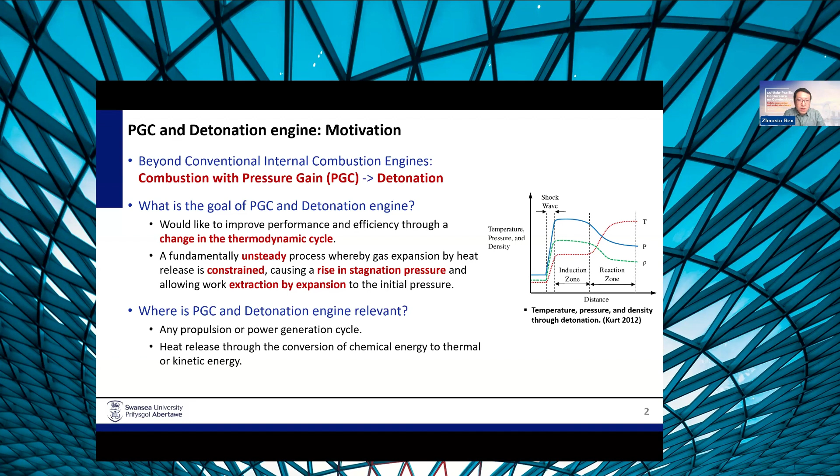We can see that there are different propulsion applications based on this detonation. For example, traditional engines like gas turbines primarily use diffusion combustion, and some rocket engines use premix combustion. On the contrary, detonation engines offer a unifying solution - the same system can be adapted for gas turbine, ramjet, and rocket engine.

From a practical standpoint, conventional combustion chambers are typically cylindrical, but detonation engines do not need such typical geometries, because detonation is a surface-level chemical reaction. This means we can build the combustion chamber more flexibly, in different configurations.

For example, the top left shows the conventional configuration, with two concentric cylinders and the flow channel where detonation occurs. If this setup is compressed, you can transform it into a racetrack-shaped detonation system, shown in the top right figure. The bottom left illustrates how detonation can be integrated into a ramjet or scramjet. This highlights that we can build different configurations and shapes of structures for detonation applications.

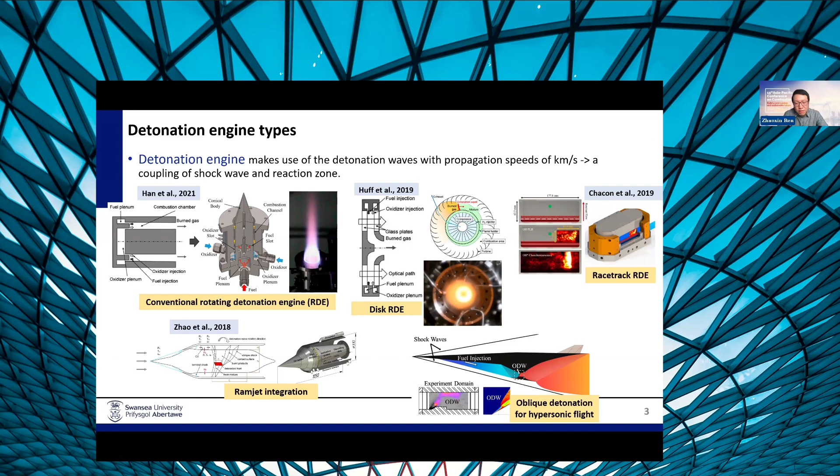If we look at a typical rotating detonation engine, we focus on the flow inside - this is two concentric cylinders, with the detonation wave propagating inside in the circumferential direction, and fuel and air injected from the bottom, as shown in the left figure. Combustion occurs as the detonation wave consumes the mixture.

Because it's a highly compressed system, it involves compressible flow interactions, mixing dynamics, and wave phenomena. The detonation wave front itself is very thin, usually on the order of sub-millimeters, compared with the size of the chamber, which can be meters. This means the length scales cross a very wide range, from millimeters to meters, across the whole engine size.

Another factor: reaching a steady state can take several seconds, but the detonation wave itself is very fast. This means the whole flow scenario crosses a wide range of both length and time scales. This complexity makes detonation flow simulation, in terms of computational cost, very challenging - one of the most difficult flow problems to study.

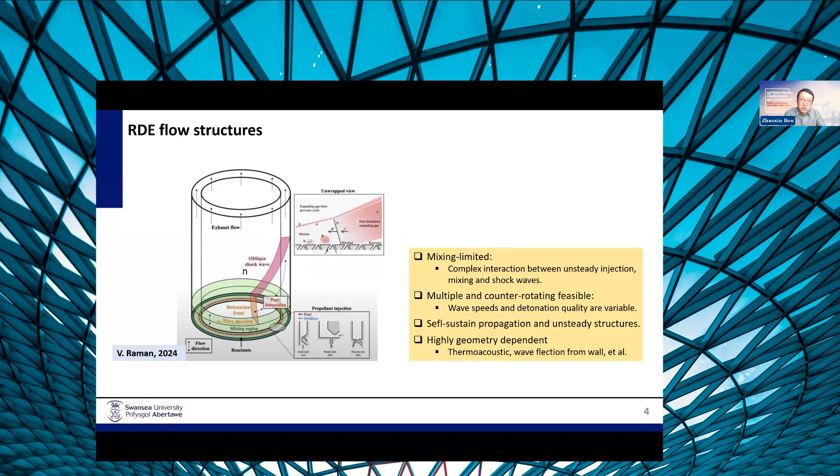If you check the detailed structures of the detonation waves, you can see that they are not smooth surfaces. Instead they exhibit some cellular formations with concave and convex features. These structures play a crucial role in sustaining the detonation propagation.

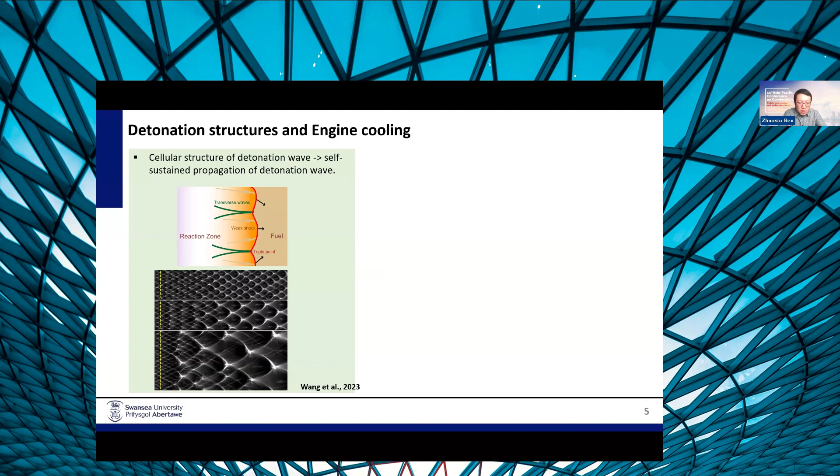If we consider the practical application, the challenge is thermal management, because you can see the very high pressure and temperature of the detonation products. So the cooling channel is typically placed around the outer cylinder. However, the influence of the cooling boundaries on the detonation structures remains unknown to us, which motivates our research.

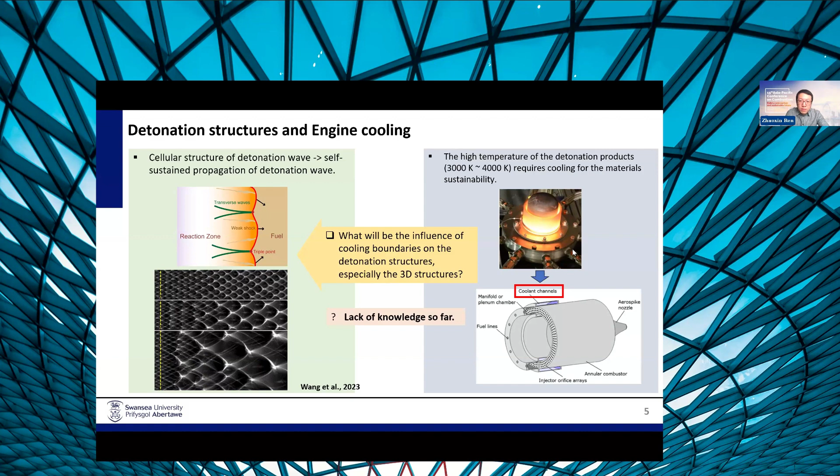For simplicity, we do not consider the curvature of the cylindrical channel. Instead, we model a three-dimensional linear periodic channel. We unwrapped the 3D annular combustion chamber into a straight linear channel, as a replacement, to see the propagation of the detonation wave in this linear channel.

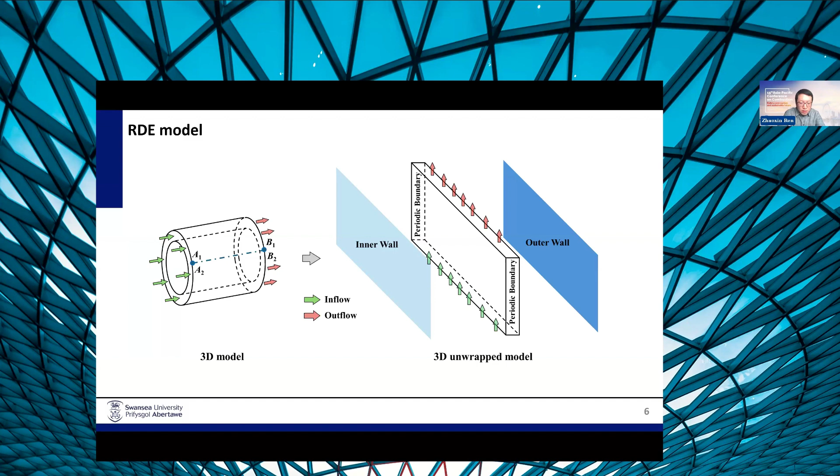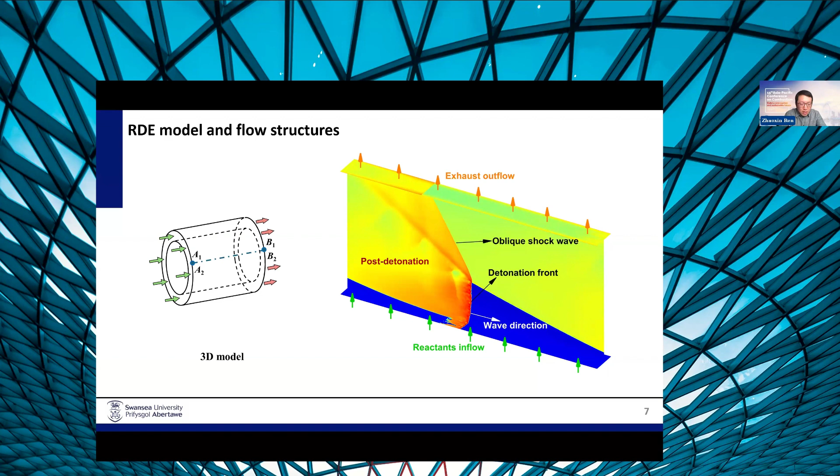You can see that the primary structures in this linear channel are closely similar to the flow structures in the annular chamber. By modifying the thermal conditions on the wall boundaries on each side of the channel, we try to analyze the influence on the detonation propagation and structures.

In this presentation, I will cover first our computation approach, and then we analyze the three-dimensional structures under adiabatic confinement boundaries, and then we try to study some effects of the thermal confinements.

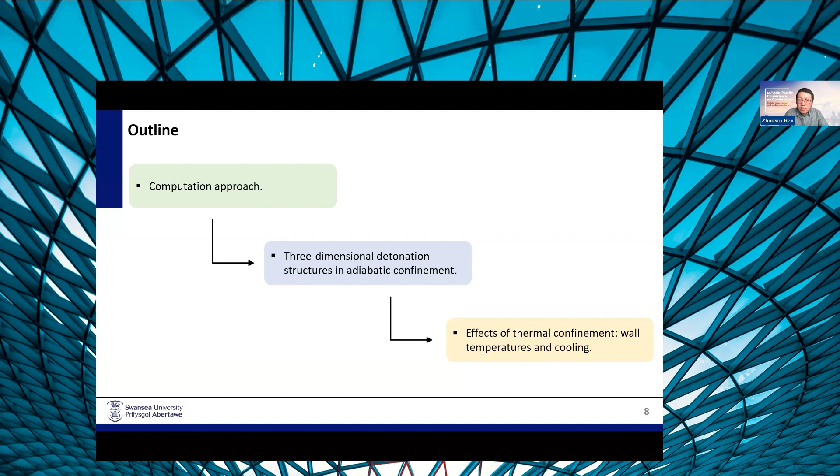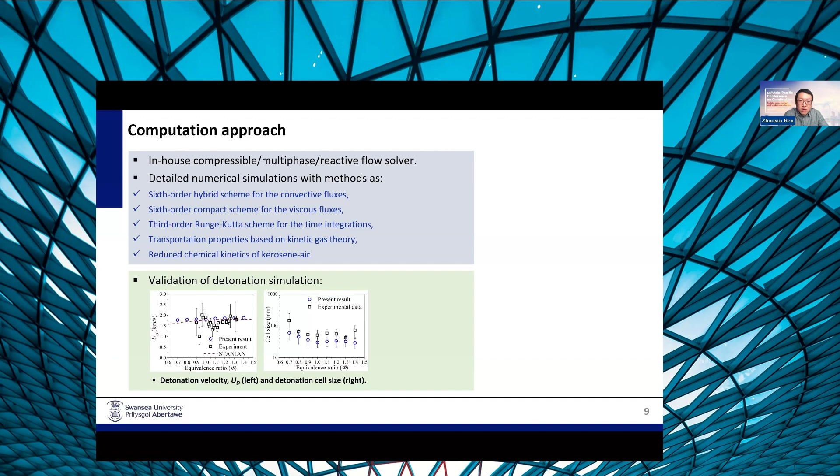For example, we change the wall temperatures after cooling to see how the behavior will change. We use some high order schemes to capture the dynamics of the detonation waves, and we use kinetic gas theory to model the transport properties. Before the simulation, we did some validations, for example comparing cell size and detonation speed with experimental databases.

We choose some proper inlet conditions to mimic a ramjet mode of the detonation engine flying at 25 kilometers height, with a flight Mach number of about 4.5. We choose 3 cases to mimic different scenarios for the thermal confinements.

For the inner wall and outer wall, we choose adiabatic and isothermal conditions to mimic the wall after cooling. The case IAOA means the inner wall and outer wall are both adiabatic. The case ITOT means the inner wall and outer wall are both isothermal at 300 Kelvin after cooling. The case with mixed confinement means the inner wall is adiabatic and the outer wall is isothermal after cooling.

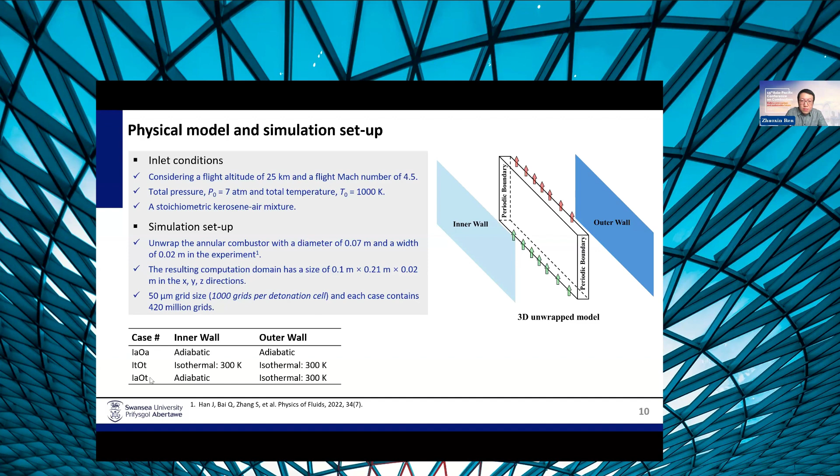First we have a look at some structures under adiabatic walls. The adiabatic walls mean there's no heat transfer across the walls. We can see that a single detonation wave propagates through the channel, as shown on the right side by the sectional views of the pressure and temperature fields.

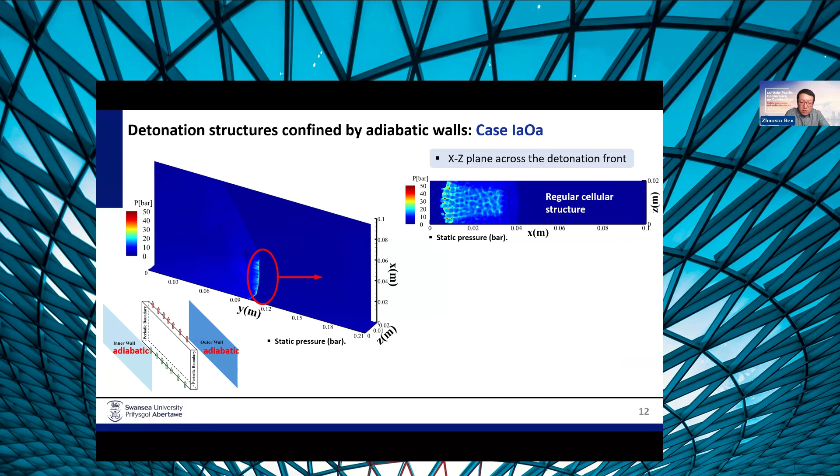If we choose some 2D planes across the detonation front, we can see some regular cellular structures with uniform cell size. So we can see the structure is uniform if we look at the pressure distribution.

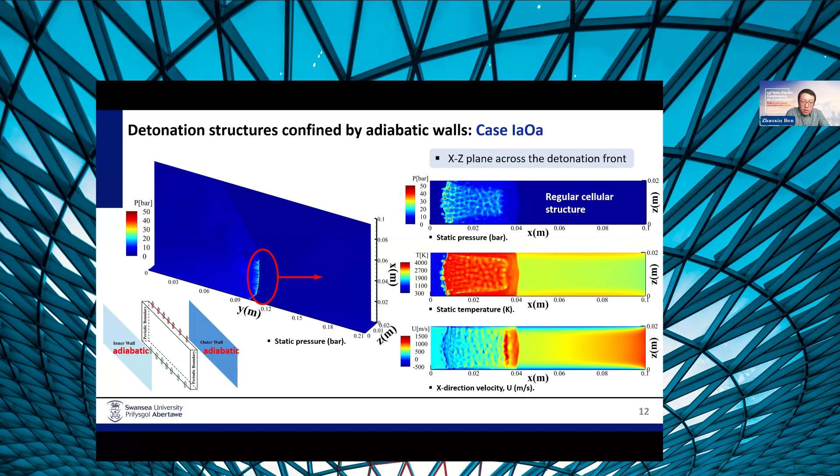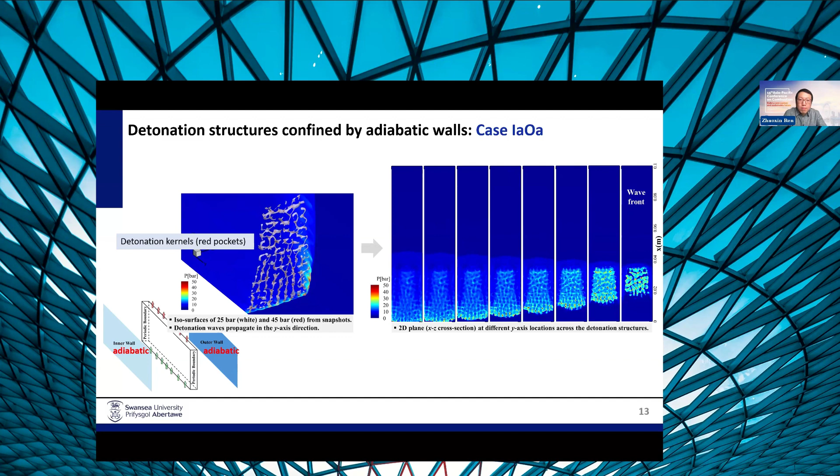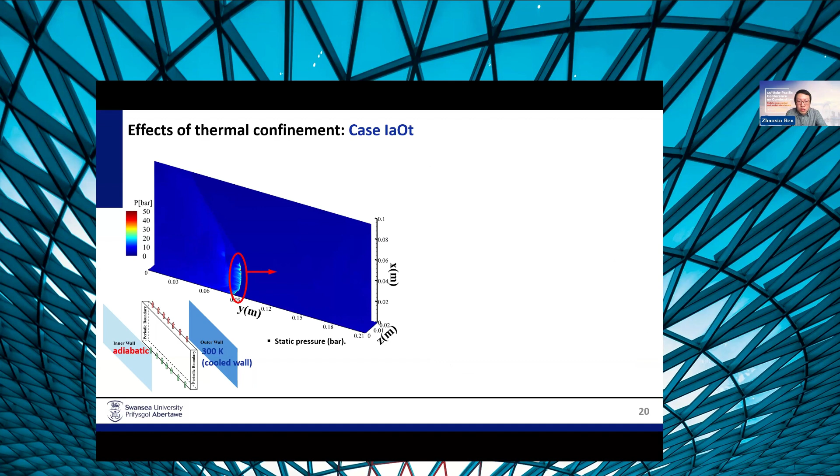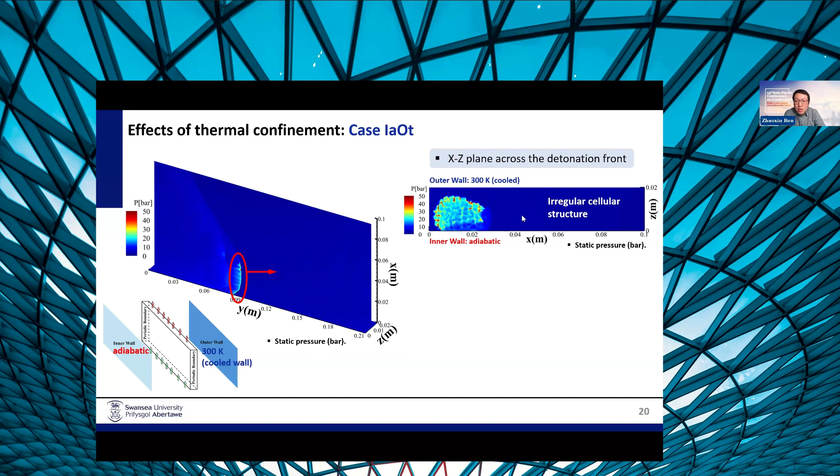Similar to the previous analysis method, we make a cross-section along the detonation front. On the right figure, you can see the cross-sectional plane, a 2D plane, where the outer wall is at 300 Kelvin after cooling, and the inner wall is adiabatic.

We can see that the detonation structure seems like a combination of the structures we previously saw under cooling and adiabatic boundaries. The lower part is similar to the structures under adiabatic confinement, while the upper part is similar to the structures under cooling conditions, resulting in a scenario like irregular cellular structures.

Here's the dynamic process - we can see there's a very strong wave-wall interaction, which results in these irregular detonation structures. You can see the wave propagates towards the cooler side and reflects from the wall and returns back.

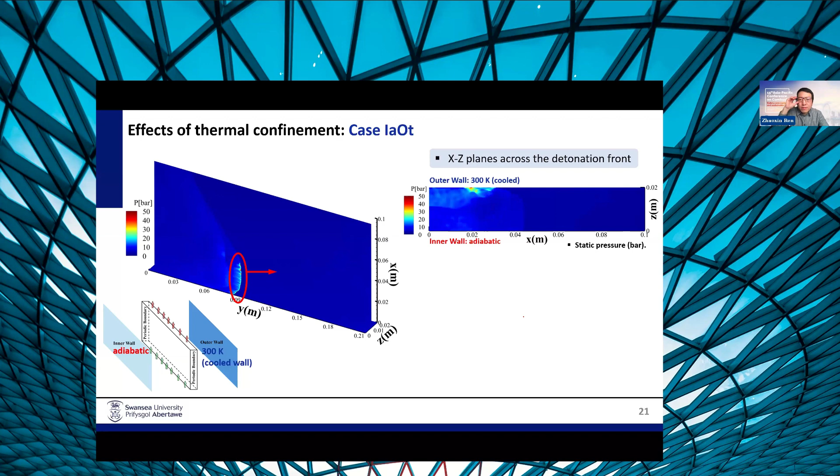Here we have some comparison of the three cases we apply in the study. It can be concluded that the thermal boundaries do have an impact on the detonation structures - not only the number of the detonation waves, but also the three-dimensional detonation structures.

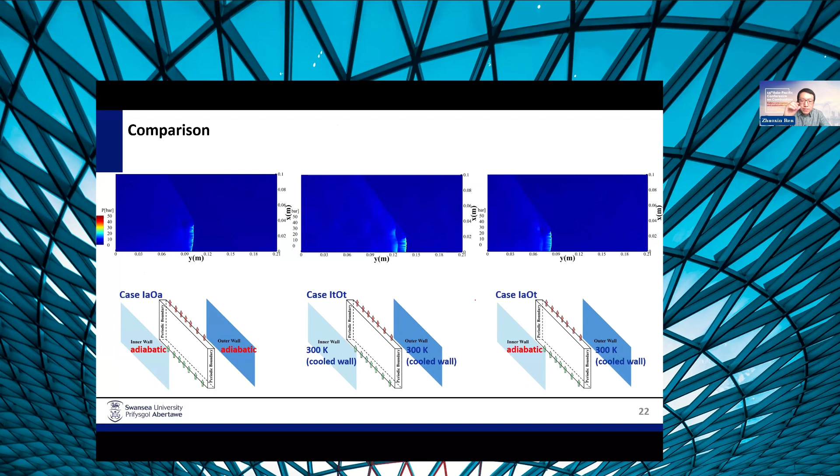Then I would like to look at the dynamics of the cellular structures, analyzed based on the maximum pressure history. This figure shows the 2D slice from the channel. If you see the adiabatic boundaries, they produce detonation cells which appear more regular.

You can see the maximum pressure history here for the adiabatic boundaries - these have similar size for each cell. If you see the case with cooled walls, the cold channel, on the other hand, has no clearly regular detonation structures, as shown by the random white bandings.

In particular, the cells are longer in the direction perpendicular to the propagation direction of the detonation wave. And the elongation pattern of the structures is more obvious near the wall boundaries.

For the mixed thermal confinements, the cells near the cold wall are stretched, as you can see here and here. And the size of the cellular structures near the hot boundaries are more regular.

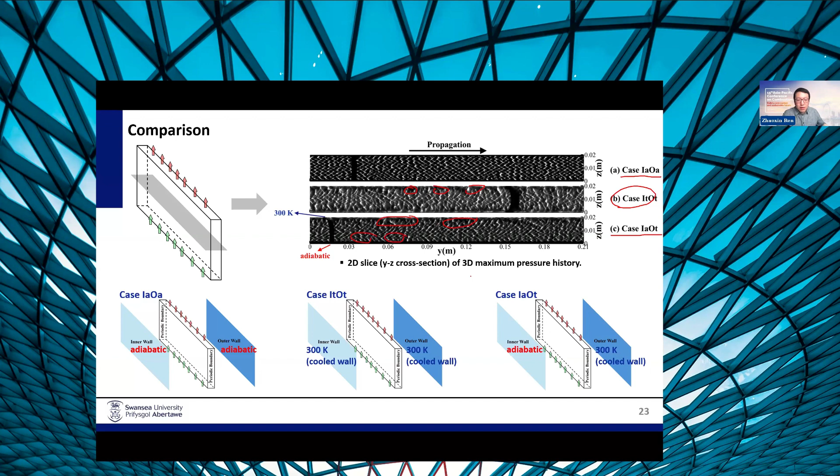If you see the maximum pressure history on the walls for the case with mixed thermal confinements, looking at the wall which has the cold temperature, we can see many white straps here. This is the traces left by the wave and wall interactions.

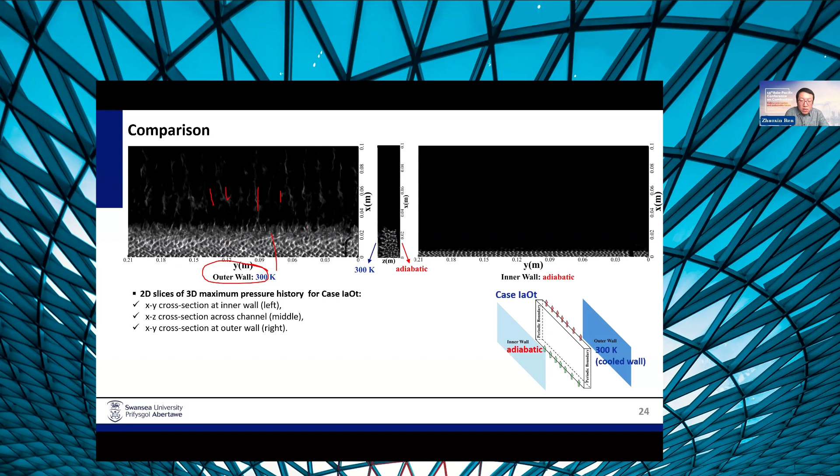Okay, at last we want to see the pressure signals collected by the fixed observation point. These profiles provide some insight into the peak pressures of detonation waves. It's interesting to find that the case with cooled walls shows the highest detonation pressure.

We also see significant instability with large fluctuations of the detonation pressure. Based on the pressure signals, we calculated the detonation wave propagation speed. Initially, the case without cooling has the fastest speed, but after an unstable phase, the cases with cooled walls show similar propagation speed to the adiabatic case.

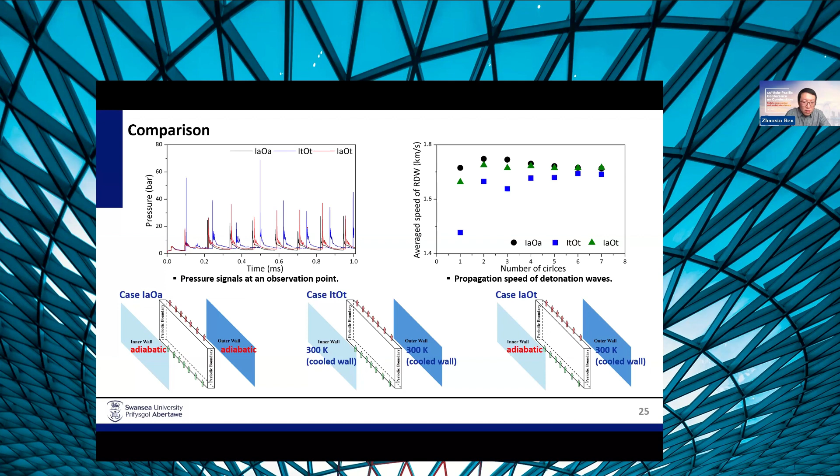So we go to the summary of the research. Thermal boundaries can significantly influence the detonation structures. We have regular structures under adiabatic thermal confinements, but irregular structure patterns under cold boundaries, with some strap-like structures.

We can find two types of detonation kernels: multi-kernels, which is a regular kernel under the adiabatic thermal confinements, but we see some linear detonation kernels under the cold thermal boundaries. And the mixed confinements show hybrid structures with asymmetric wave behavior.

If you look at the pressure signals, the maximum pressure signals reveal that the cold cases exhibit the highest peak pressures, but also the most instability. This shows that if we're considering cooling, we should carefully design how much we can handle the temperature at the wall boundaries.

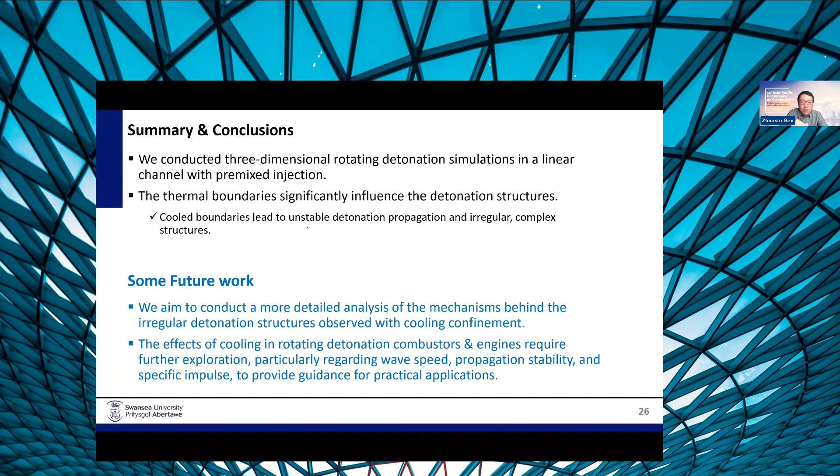For future work, we would like to detail some parametric studies and do experimental validation to further refine our understanding of why irregular detonation structures occur under cooled thermal confinements. So that's my presentation, thank you for listening, and welcome any questions or comments.

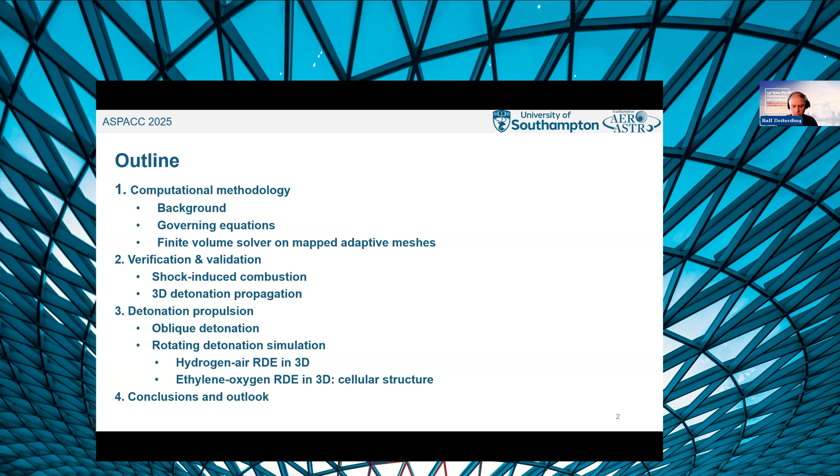Then I have some verification and validation results, some common test cases that people use in the detonation field. In the second part of the talk, I'll talk particularly about detonation propulsion, where I have results about rotating detonation engines, and equally with different temperature boundary conditions.

As mentioned in the introduction, I have put on the internet the AMROC framework. AMROC is a system to do structured mesh adaptation on Cartesian grids. It works such that rectangular grids overlay one another, and these grids talk with interpolation and restriction operations with one another. Mesh adaptivity is particularly important for detonation waves because the interaction between fluid dynamics and chemical reaction is nonlinear, and you need quite some high resolution to capture that correctly.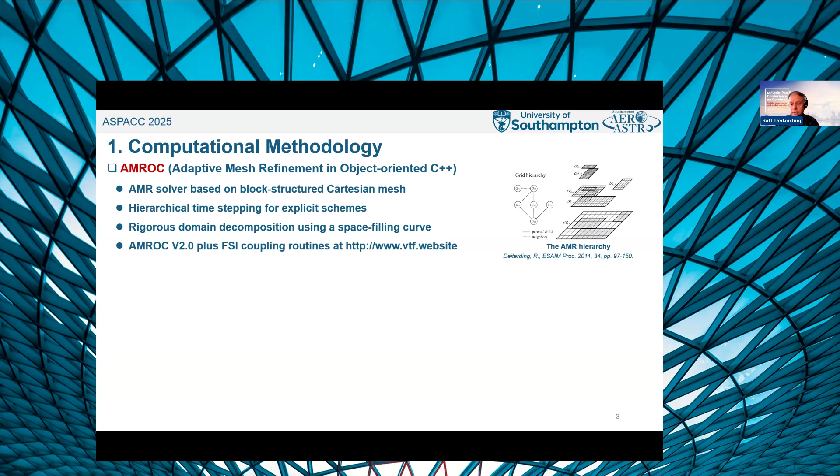AMROC originally in that Cartesian form is not particularly suitable for rotating detonation engines. The original version of AMROC is Cartesian and uses embedded boundary techniques to consider complex geometry. But if you're solving the Navier-Stokes equation with a boundary layer using Cartesian grids, it can be quite inaccurate. A rotating detonation engine is best modeled with a cylindrical mesh, and this is why we recently have put a lot of effort into moving to curvilinear meshes.

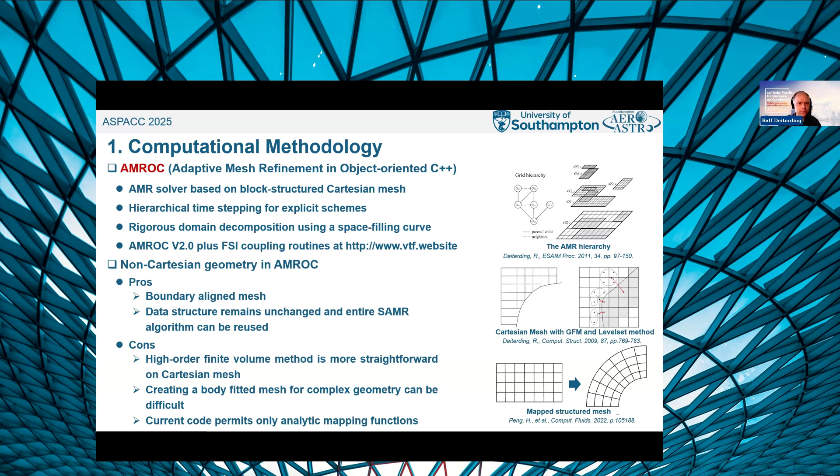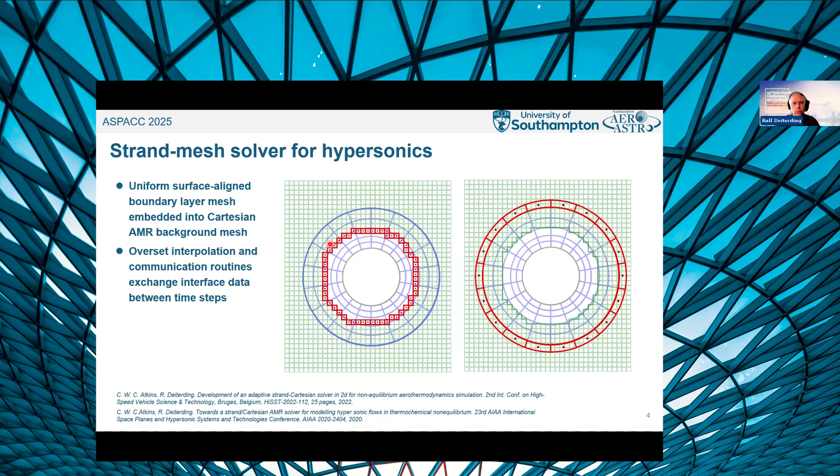The first work we did in this direction was with my PhD student, Chai Atkins. That wasn't for classical combustion, but for hypersonics, meaning particularly thermodynamic non-equilibrium with multi-temperature models and also chemical non-equilibrium from air dissociation. The software we constructed in 2D is an overset mesh technology where we have Cartesian adapting background meshes, and then near the surface of a body, we use body-aligned meshes that are grown in the normal direction to the surface. These meshes talk with one another through overset interpolation operations. You see here at the red cells, this is where interpolation communications have to happen.

We then use this particularly to study typical hypersonic applications, like for instance here, a double wedge in axial geometry. It's actually symmetric, and a shock wave is forming. When we zoom in a little bit, you see that the shock waves, etc., are dynamically captured by the Cartesian mesh.

The boundary layer near the embedded object is captured with its own non-Cartesian mesh. In hypersonics, it's all about the temperature in the boundary layer, and this boundary layer here is resolved very well. This model uses two different temperatures, one for translation and rotation and another for vibrational temperature, as depicted here.

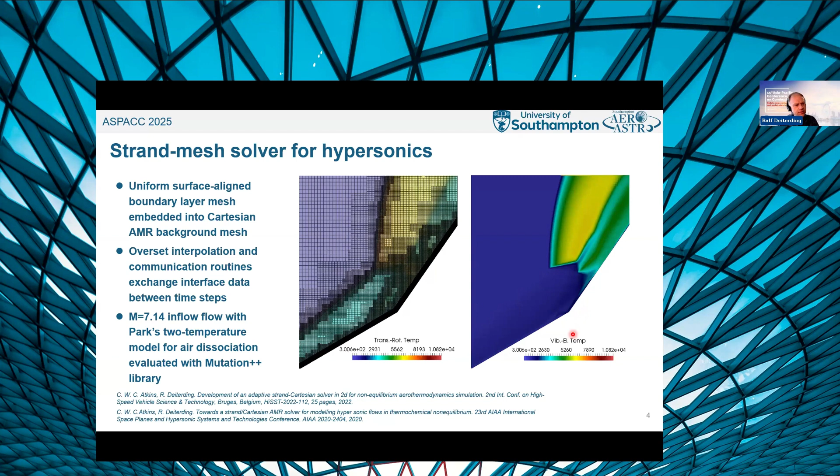So then the chemical reaction, in this case, is evaluated with the Mutation++ library.

Based on this work, in a sequence of papers, Han Peng has been able to extend this methodology particularly to combustion problems. Here we solve fully in 3D, and you will see results about that, the Navier-Stokes equation in the form typically used for combustion modeling. Like in hypersonics, the heat capacities are temperature dependent, but here we take the values from the Janaf table in the form of fourth order polynomials. We use the Chemkin library to evaluate the chemical reaction. Mixture viscosity, mixture conductivity, and diffusivities are all evaluated with Chemkin standard routines.

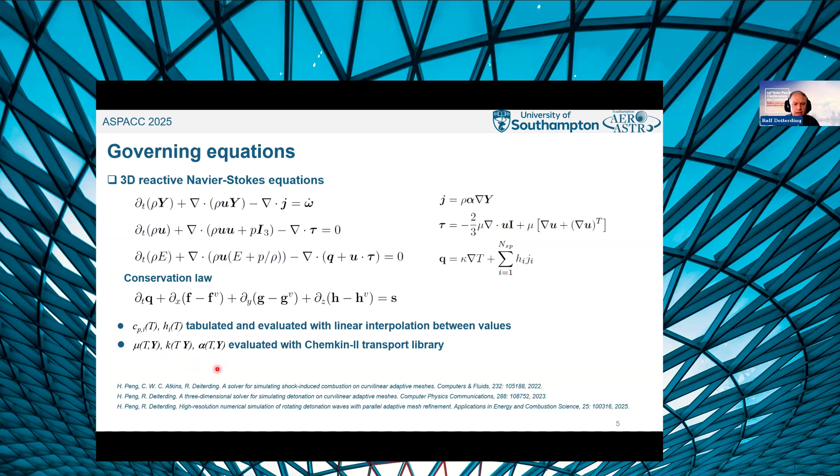While in hypersonics we usually model the degrees of freedom in the gas directly, here, because the data is in polynomial form, we usually go through a form of the energy equation that we effectively have to solve inversely to obtain the temperature. Here, of course, in combustion, there is only one temperature - it's thermodynamic equilibrium, so vibration is not specially considered. We use typical Arrhenius kinetics with only one temperature through Chemkin to evaluate the reactive terms.

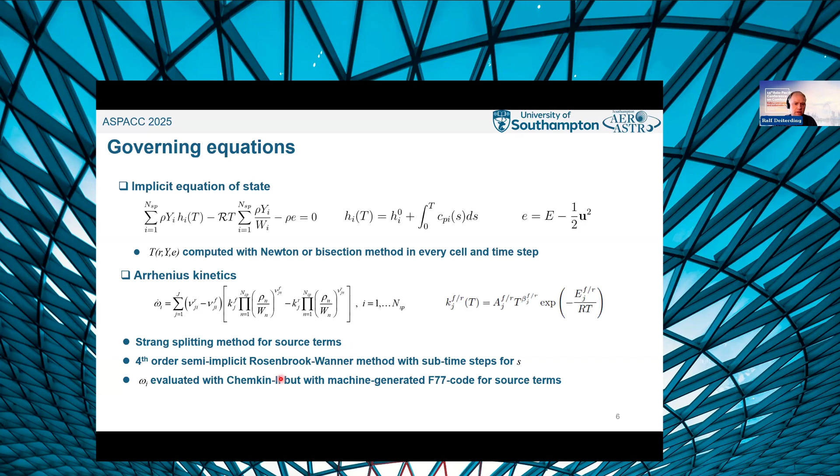The method we are using is a splitting method, so we solve the chemical reaction terms in each finite volume cell. We do this, still today, with a fourth order semi-implicit Rosenbrock-Wanner method. We use the same method also for hypersonics, where we have the non-equilibrium source term in addition, and that method works exceptionally well.

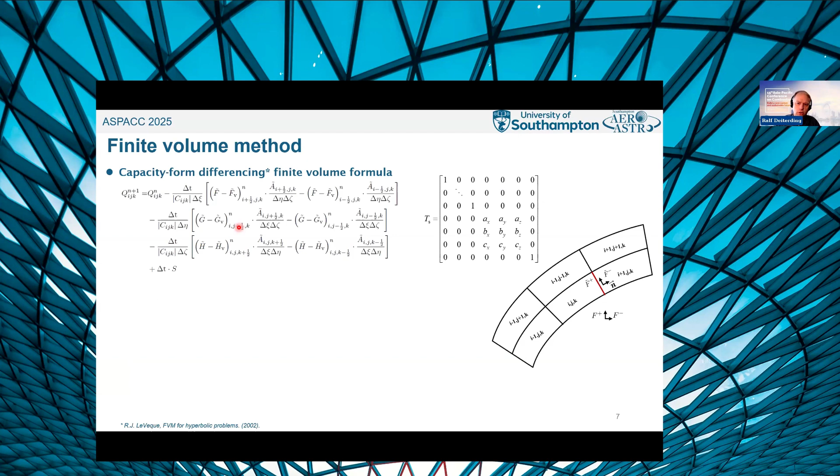When we want to go to non-Cartesian meshes, we have to extend the finite volume formula. We have to consider the change in volume due to the mapping and the different area of the facets. Here we use a form called capacity differencing. In this form, we solve the convective fluxes and then the viscous fluxes, and add them together. When solving for the convective fluxes, we do this with a Riemann solver, which we had from the Cartesian framework.

What we do is use a transformation matrix T that implements a rotation from the physical coordinates to the computational coordinates. We then apply the prior Cartesian Riemann solver, and after obtaining this flux in Cartesian form, we rotate it backwards with the inverse of the transformation matrix. The convective fluxes are enhanced to second order with a Muscl-Hancock approach, and the viscous fluxes are added as central differences in finite volume form. Because in this formula we are adding both fluxes together, we then have to add this to the convective CFL condition.

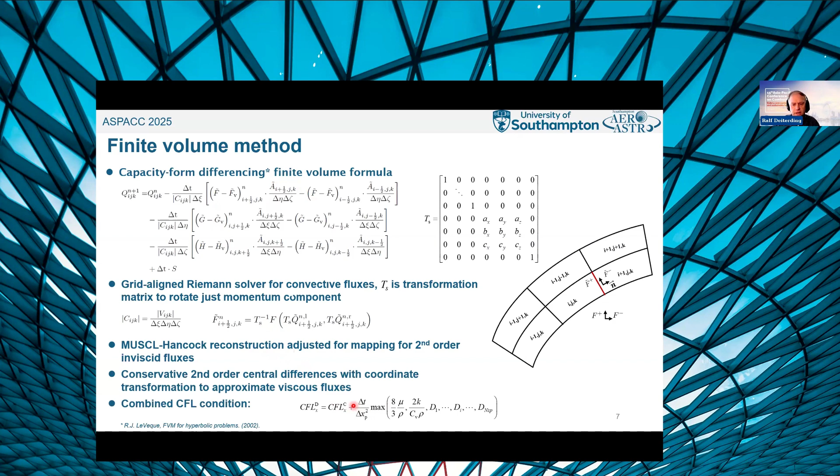So for the convective fluxes, we use Riemann solvers. First, we used the Roe scheme that actually dates back to my own PhD thesis. We combine this with an HLL scheme, such that within the Riemann problems, we evaluate the intermediate states if there is a problem with the state vectors.

The Roe method can undershoot in pressure and in energy, particularly in a vacuum situation. When that occurs, we switch to the robust and positivity-preserving HLL scheme, which is important for robustness in particular applications. And of course, the Roe method also has entropy correction and carbuncle correction.

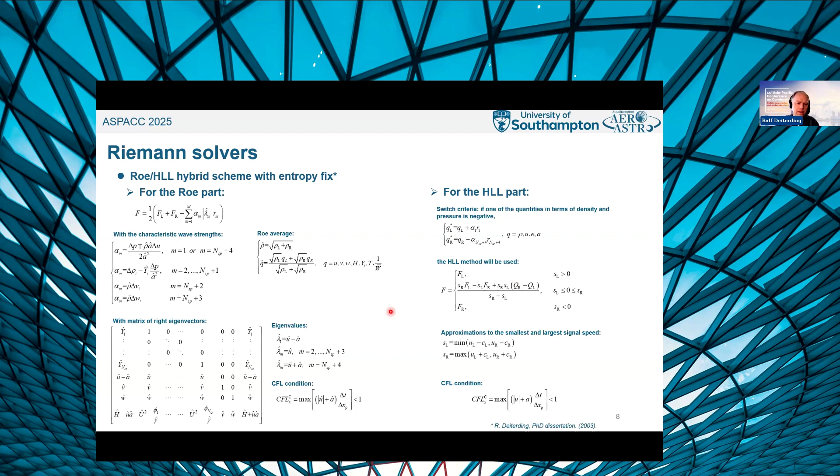A problem we encountered, particularly with the Roe scheme, when doing non-premixed computations of rotating detonation engines, is the very classically known issue that when the heat capacities vary considerably across different species and they are non-premixed, pressure perturbations can occur purely of numerical nature. It's a very classical problem in combustion, and here it was rather pronounced with the Roe scheme.

So here we then often switched to the HLLC scheme, the HLL method with a restored contact discontinuity. We take very much the standard scheme here. While this method does not entirely eliminate this pressure problem, it mitigates it to an extent that it is practically usable. There is no carbuncle correction, but it is also not a problem in the cases that we considered.

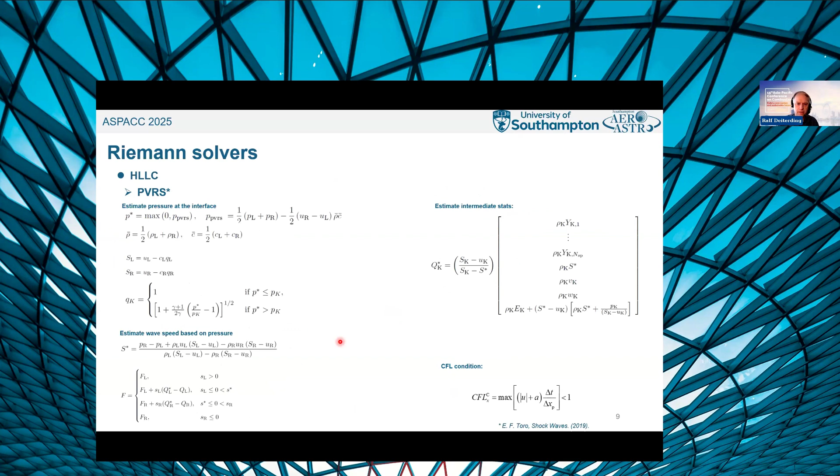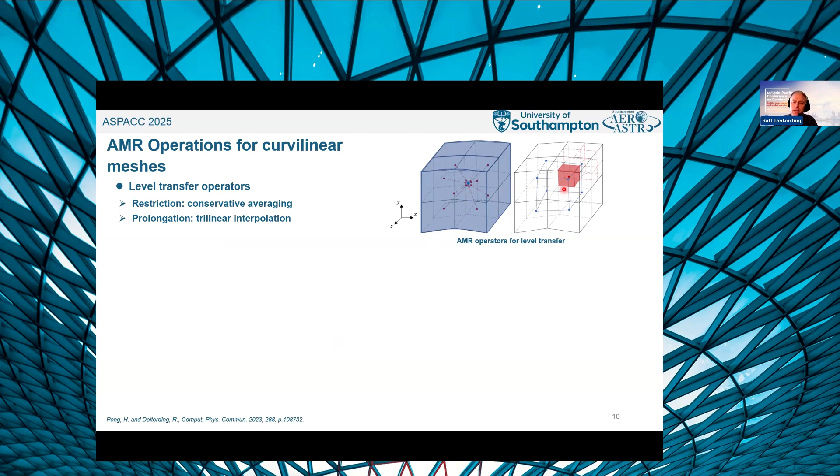So in order to construct an adaptive mesh method on the curvilinear mapping, you of course also need to extend your AMR machinery. While the communication between grid patches happens in an index coordinate system, you have to extend the transformation operations that do the averaging and the trilinear interpolation. You need to consider the volumes when averaging, and the change in central location of the finite volumes when interpolating.

The final operation that is often overlooked in these structured mesh methods: one first updates coarser grids, then moves over to the finer grids using coarse grid data as internal boundary conditions. When projecting the data backwards down at the end of the time step, this typically leads to an error in conservation because the fine grid fluxes have not been properly considered for the coarse grid interfaces. So this is implemented as a fix-up step.

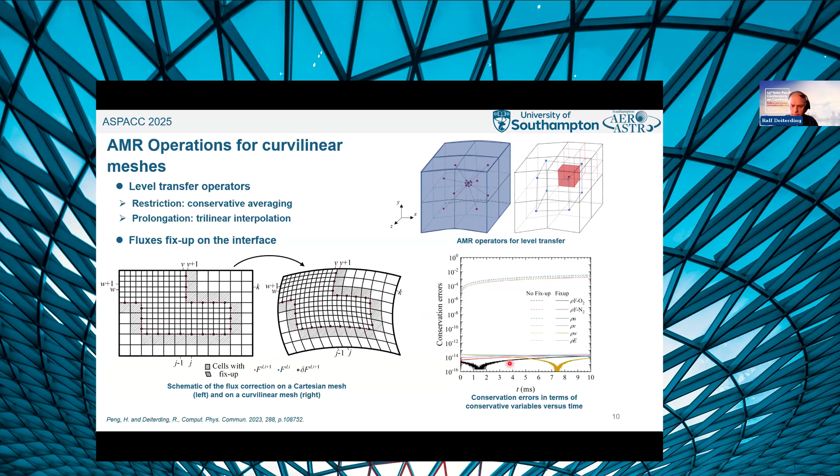And here we also implemented this fix-up step on the curvilinear grid, considering the facet size. When we do this, we have no conservation error until machine accuracy.

So the first test cases, and these are very classical test cases for detonation solvers, is the projectile experiment by Lehr. What we have here is hydrogen and oxygen perfectly mixed, and then small projectiles of 1.5 centimeter diameter are shot into this mixture. The trick is they fly at a velocity close to the Chapman-Jouguet detonation velocity, and then you get detonation features at the front of the projectile, particularly at the stagnation point.

At the stagnation point, as we've seen in the prior talk, we get the formation of transverse waves along detonation waves, and this feature happens exactly at the stagnation point. For different flight velocities, you obtain different perturbation frequencies, very characteristic in nature. This is one of the most important benchmarks for detonation computations, and results from prior computations by different people have been quite diverse.

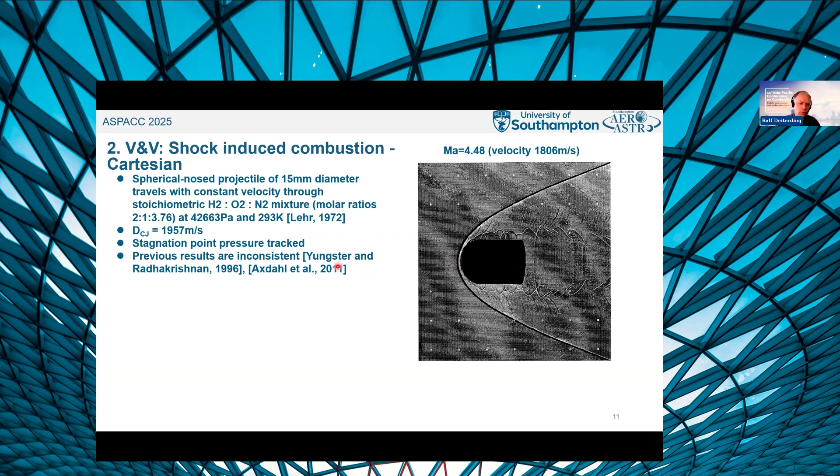So here this problem is simulated with a strictly Cartesian method, and we see the front of the projectile, and then the entire projectile. You see, when this is running with a Cartesian grid solver, the formation of transverse waves and how they form a very regular structure over the projectile. And here we see the dynamically adapting Cartesian meshes following this behavior.

This is at a resolution of 9.4 micrometers, using the Jachimowski mechanism. When we ultimately used the Navier-Stokes equations for this problem, we got within 8 kilohertz of the experimentally measured frequency for this velocity, 4.48 Mach. And for the Euler equations, you see that the error is accordingly larger.

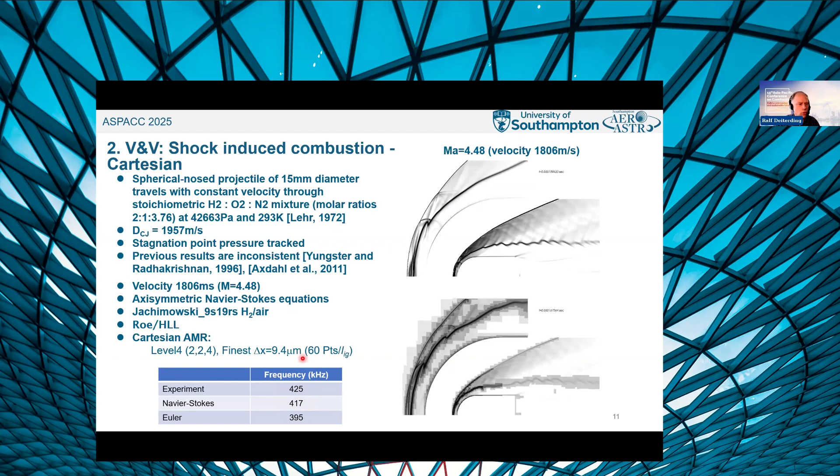So that was a while ago. And then we moved on to the non-Cartesian meshes that gave us the opportunity to focus the mesh even better in the central region where the perturbation originates.

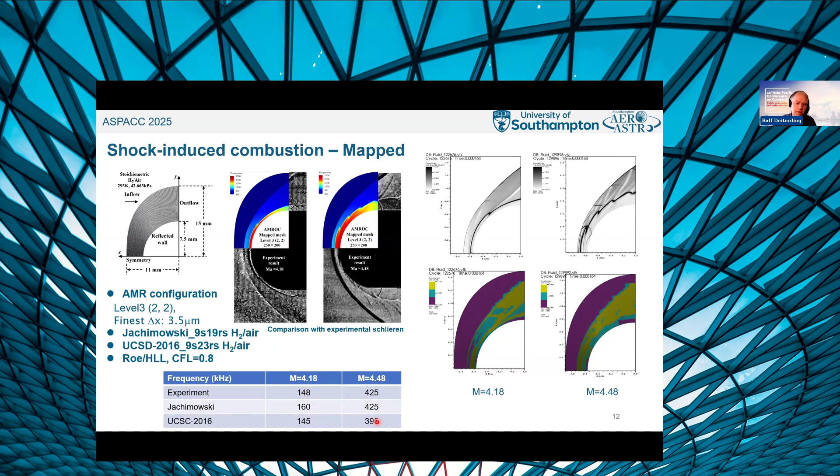So what one can summarize from this test case is that fluid mechanically, on the CFD side, we are in well shape to solve these cases with very, very good accuracy.

But the problem that arises here for this very popular test case is that, at least to our knowledge, there is no hydrogen-oxygen mechanism able to simulate all the different measured frequencies at different detonation velocities that are experimentally available, that would hit this computationally. That has turned out to be the weakest link, the lack of a reaction mechanism over all the ranges of available experimental results.

And that is a reason why people have reported somewhat ambiguous results for this test case, the variation particularly in reaction mechanisms.

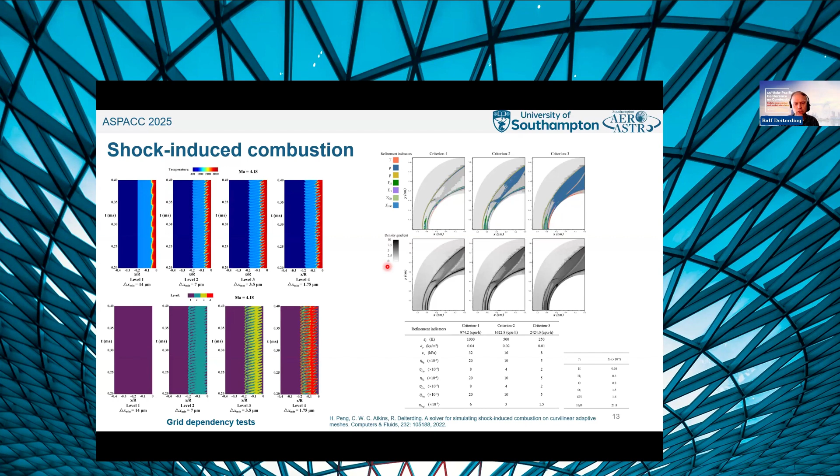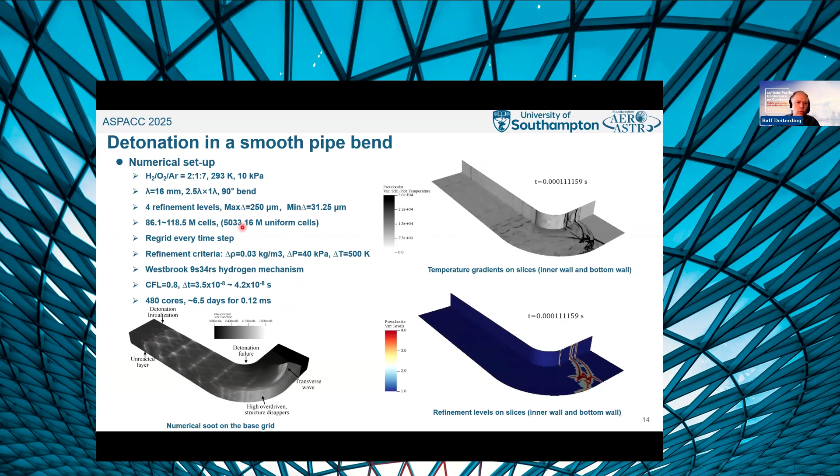Yes, so you see here how the detonation is propagating around the pipe bend. The dynamically adaptive mesh follows perfectly, and the adaptivity is very effective here, so we easily save a factor of 50 in computational effort.

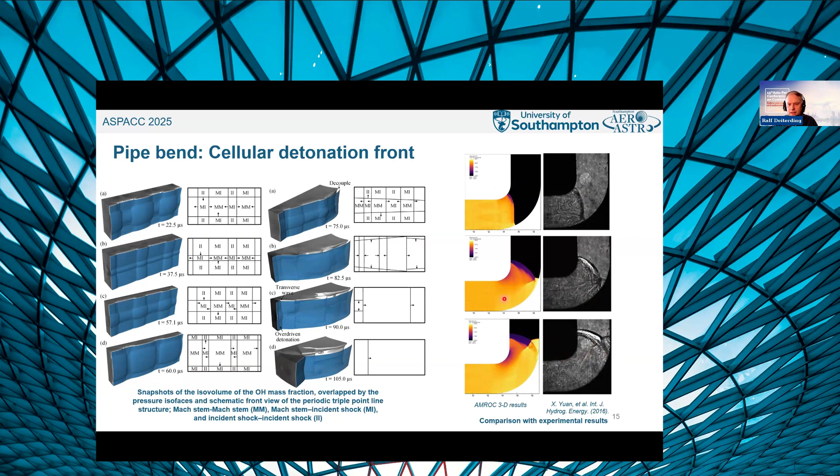The structures, due to the regular boundary conditions, are equally very regular, and then the detonation goes particularly through the bend, and we see a typical decoupling between the shock wave and the flame front of the detonation. You see here that the experimental results from this macroscopic perspective and the detonation agree very nicely.

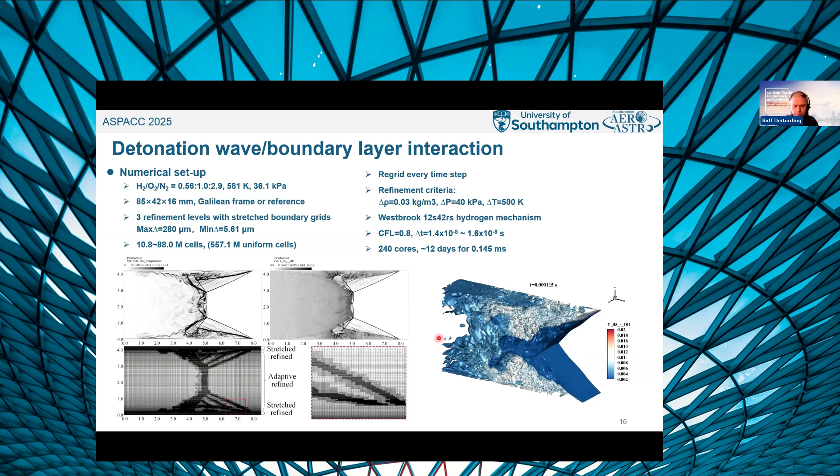So if you don't want to deal with detonation and shock boundary layer interaction, what do you have to do? Well, you have to bleed away the boundary layer. So here we do a very realistic real-world computation of an oblique detonation combustor.

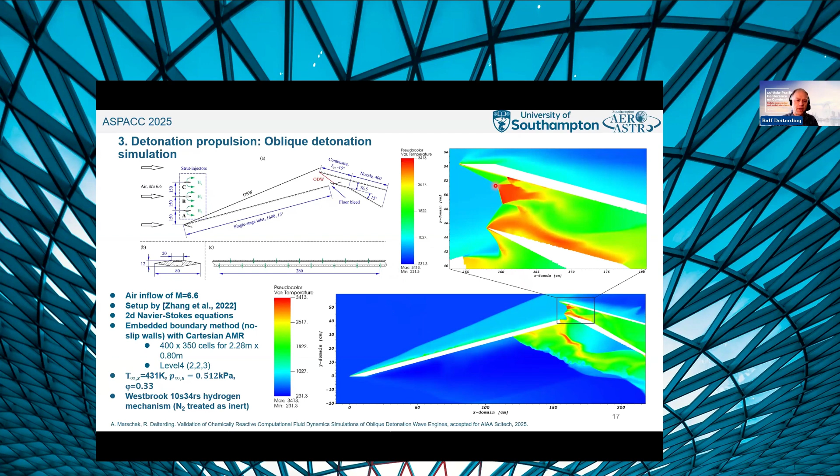And then here we get, in the combustor, this oblique detonation phenomenon. So then zooming in on that, you see here the experimental Schlieren image, and here our computational image, with the mesh adaptivity that automatically has been generated.

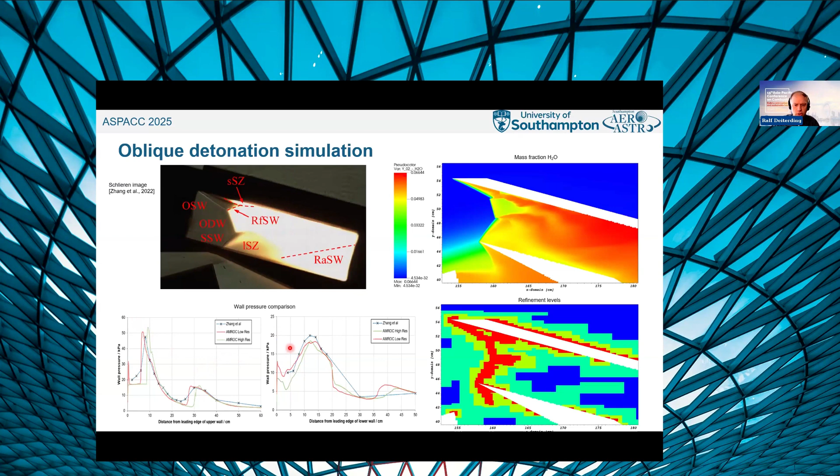So the agreement is not 100%, and the reason for that is that we effectively, particularly for the stoichiometry within the mixture at the combustor, are solving this inversely by doing many computations to determine that. But you can see we do a reasonably good job, because the agreement of the experimental results versus our computational results of the pressure at upper and lower boundary is actually quite decent.

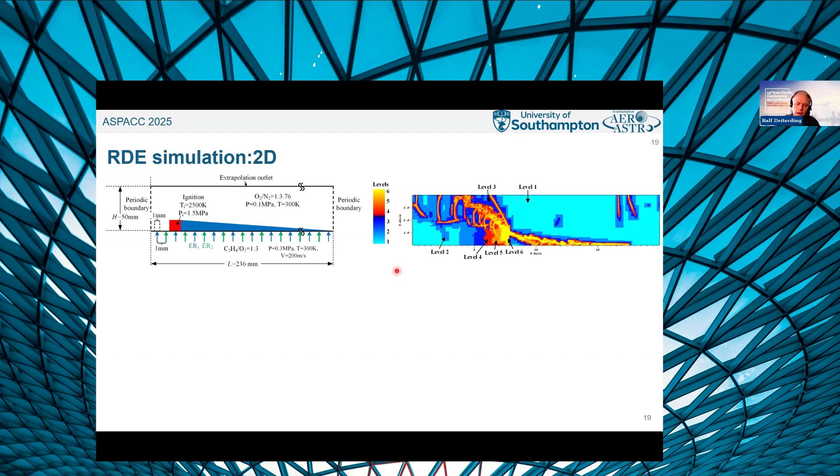With this methodology, we then move on into rotating detonation engine simulations. We've seen the features of a rotating detonation engine wave already in the prior talk. Here are computations in 2D. When you use premixed injection conditions, that is very common in 2D. Then the mixing is perfect, and we get a very perfect detonation phenomena. The detonations that propagate within this combustor usually propagate exactly at the ideal detonation velocity, at the CJ speed, the Chapman-Jouguet speed.

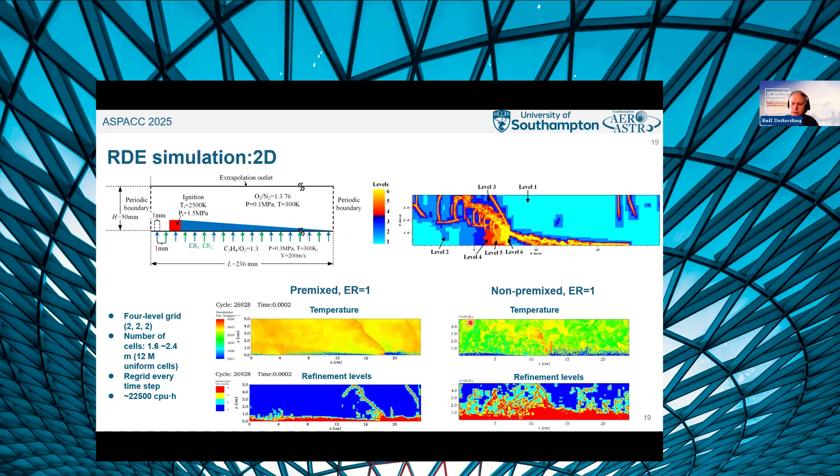If we use non-premixed conditions, the situation is heavily perturbed. Mixing is one of the primary loss mechanisms in rotating detonation engines. Here, effectively, for the same configuration, we only get one detonation wave. I think the mixing in 2D is actually the most problematic, because there is no such thing as 2D turbulent mixing. So you really have to do 3D to get the mixing even reasonably right.

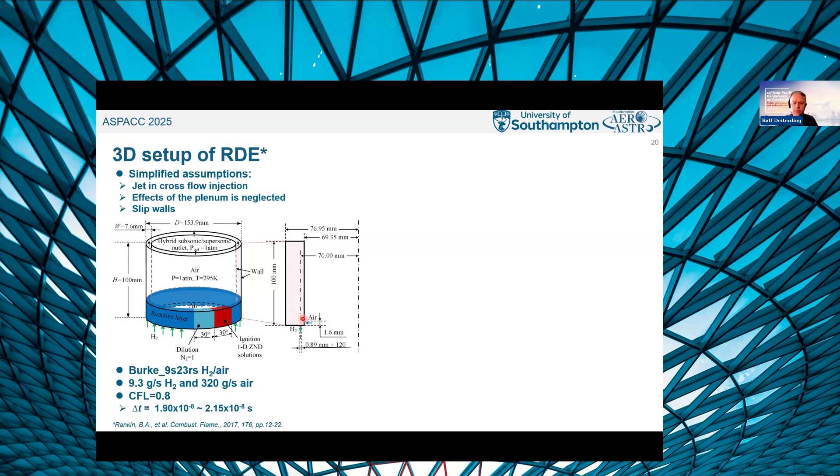The configuration we are doing here is hydrogen-air in a rotating detonation wave. It's a configuration from the Air Force Research Laboratory in the US, and we simulate this case. You see that the injection here is perpendicular to one another in the injector. Here are different resolutions of this configuration.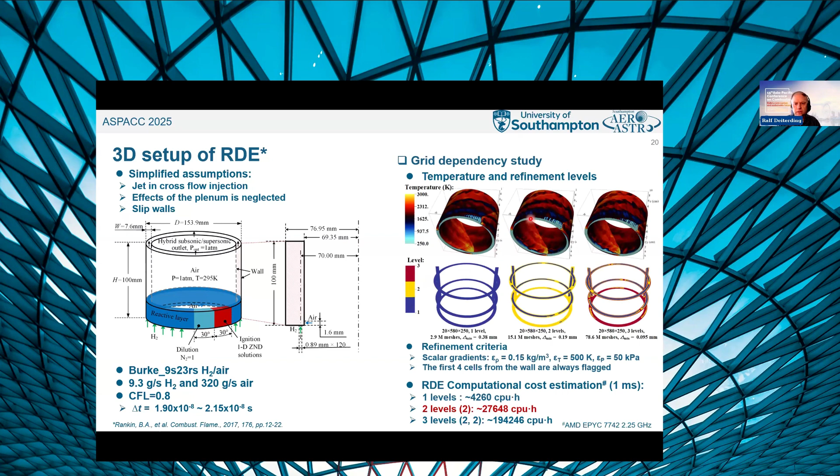They all kind of converge reasonably well to the same behavior. What is interesting is how well these computations actually agree with experimental results. That is evaluated in this investigation, where we particularly increase the mass flow rate. Generally, as larger the mass flow rate, as fewer the loss mechanisms in rotating detonation engines. So you see that the experimentally obtained detonation speed as well as simulation speed agree better and better. When the engine is smaller, when the mass flow rate is smaller, the discrepancy is larger.

Also, a particular discrepancy is that the number of heads predicted, how many detonation waves are present in the combustor, is slightly different. However, that is a somewhat ill-conditioned problem, because it's a bifurcation problem, how many detonation heads you are getting. A better measure is if we sum up the length of all the detonation fronts, because this is where detonation combustion really happens, and from a macroscopic perspective this is all that matters. If we compare that, the agreement is quite good.

If we compare here static pressure within the engine with experimental results, our results are the triangles. So we hit the experimental result actually quite well.

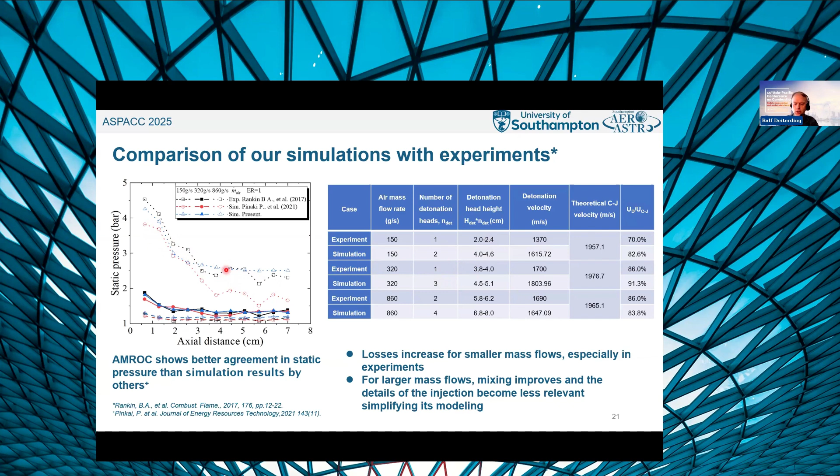We then used this configuration with an inflow of 320 grams per second to vary the temperature boundary conditions. This is very similar to the prior talk, where we used adiabatic wall boundary conditions. Here we see 3 detonation waves propagating, and then we varied the wall temperature and prescribed it at 300, 600, and 900 degrees Kelvin. Of course, 900 degrees Kelvin would be somewhat similar to what really happens in an RDE combustor.

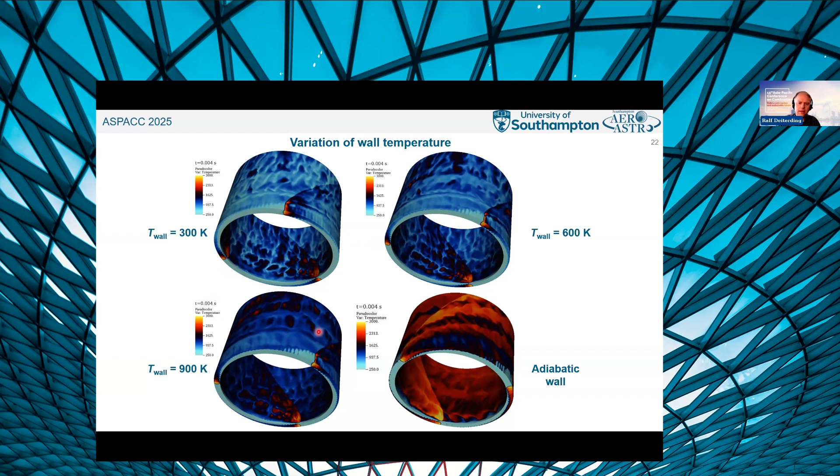At the outer and inner wall, there is an apparent difference. We see, for instance, at the inner wall, we get sub-combustion effects, so commensal and parasitic combustion that wouldn't be present in that form in the adiabatic case. I think we've seen some evidence of that also in the prior presentation.

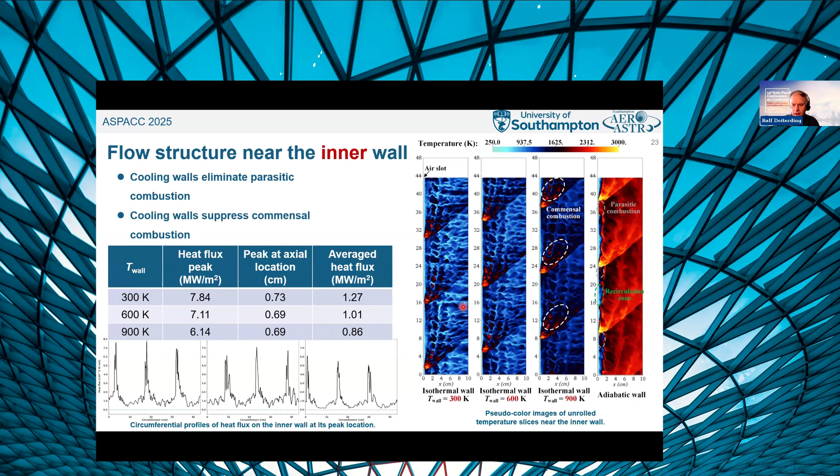What is particularly interesting is the heat flux here. When we are cooling the walls more, the temperature difference is larger, so the heat flux increases—that's at the inner wall. If we look at the outer wall, the heat flux, interestingly enough, is significantly decreased. In our case, we had injected the air from the outer wall, so this is one cooling mechanism. Also, in a cylindrical chamber, the area on the outer side is approximately 20% larger, which is another reason the heat can distribute a little better.

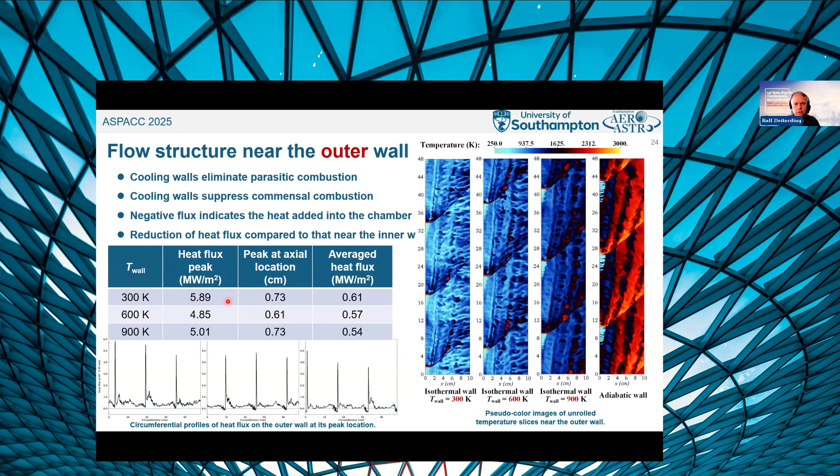But what is most interesting from my point of view is the scenario when we look at the center of the chamber. When we look at the center of the chamber, you see that the number of detonation waves in time is almost unperturbed—three waves propagating, almost unperturbed, independent of the temperature cooling. I think this is the bottom line.

Particularly for practical application, cooling of RDEs is very important to make them work. What we have found is that different wall temperatures are not a significant loss mechanism in RDEs—you can cool them happily and the combustion in the interior is virtually unaffected. That is, of course, exceptionally good news for constructing real-world rotating detonation engines.

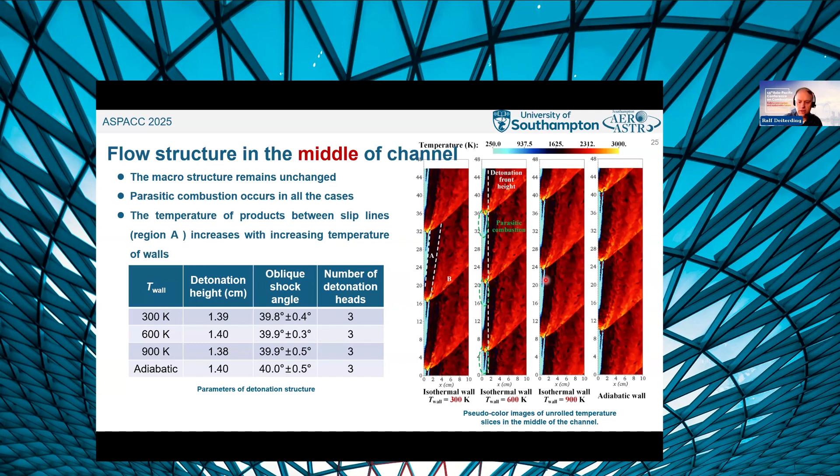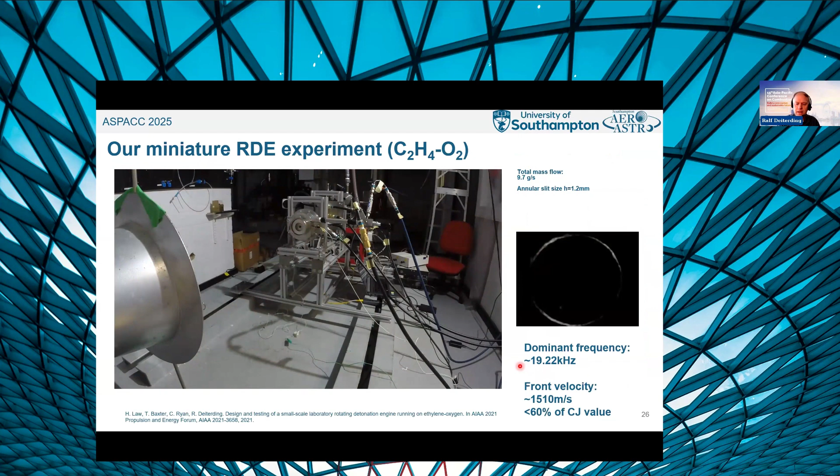Here is a real-world detonation engine, a very small one in our laboratory. It only uses less than 10 grams mass flow total and produces approximately 3 detonation waves, with quite significant loss—the detonation speed is only approximately 60% of the Chapman-Jouguet detonation speed. So there are a variety of loss mechanisms present.

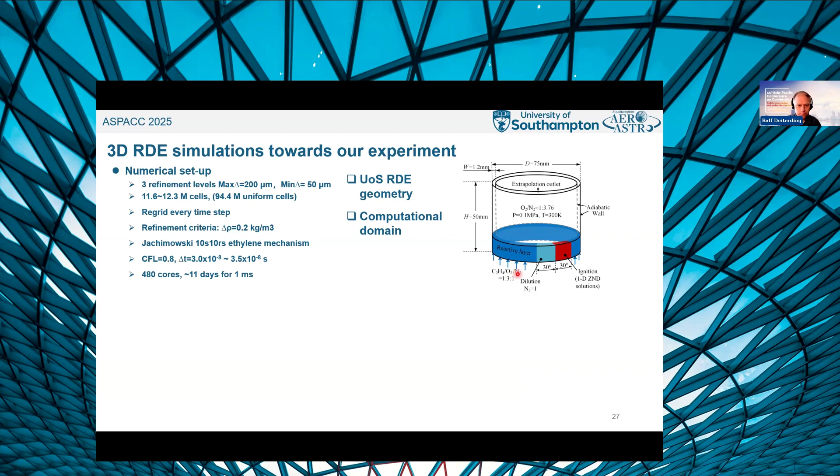We are not entirely there yet to simulate that, but we are working in that direction. Here's a preliminary computation where we are injecting not only ethylene and oxygen like in the real-world configuration, but also nitrogen for stabilization. We conducted a very elaborate convergence study, showing the typical CPU times and number of cores used.

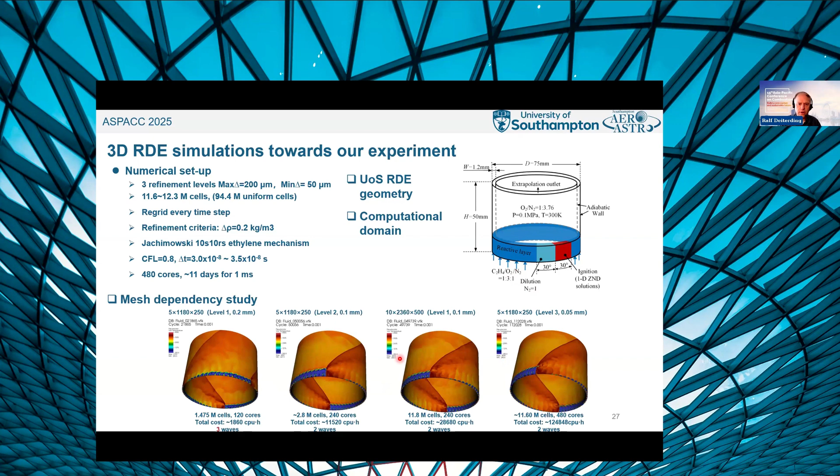We are predicting that when resolution is sufficient, we get 2 heads, so that works very well. The resolution here is very sizable, because what we were able to demonstrate is, like in the computations shown in the prior talk, we can also track the evolution of the transverse waves that are intrinsically present in any detonation propagation.

For half a detonation period, until one wave hasn't reached into the prior region of the prior detonation head, we can track these structures by tracking the maximal pressure or heat release rate, making the cellular structure visible. Our computation is sufficiently resolved to show this, and we find cellular structures in the axial direction of 1.5 millimeter size.

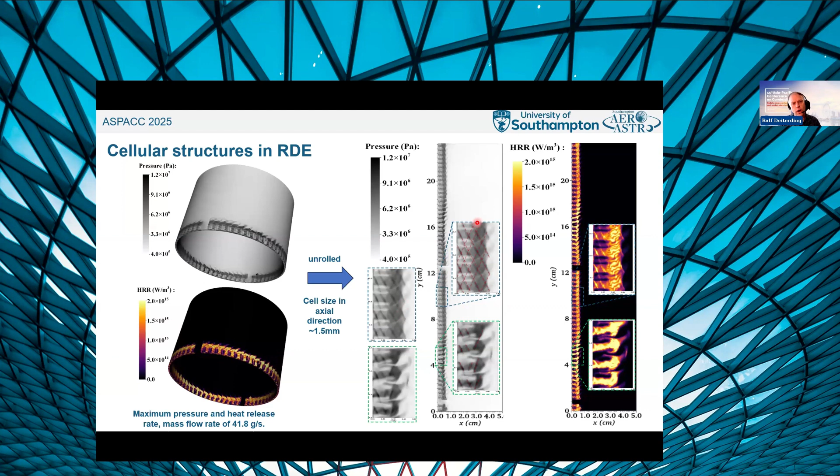The resolution is not ideal, as you can see the triple point lines are rather straight—they should be slightly more curved when the resolution is entirely sufficient—but the structure is definitely present, and that is quite an accomplishment for a cylindrical RDE combustor.

That brings me to the conclusion and outlook. I've shown how we constructed a 3D fully viscous adaptive solver for combustion—quite an accomplishment. It is based on using Riemann solvers, and savings in the right cases due to adaptivity are easily by a factor of 50. I've shown the frequently used benchmark by Lehr, and I think we can conclude one would need a better hydrogen-oxygen mechanism to simulate all the frequencies with very high accuracy.

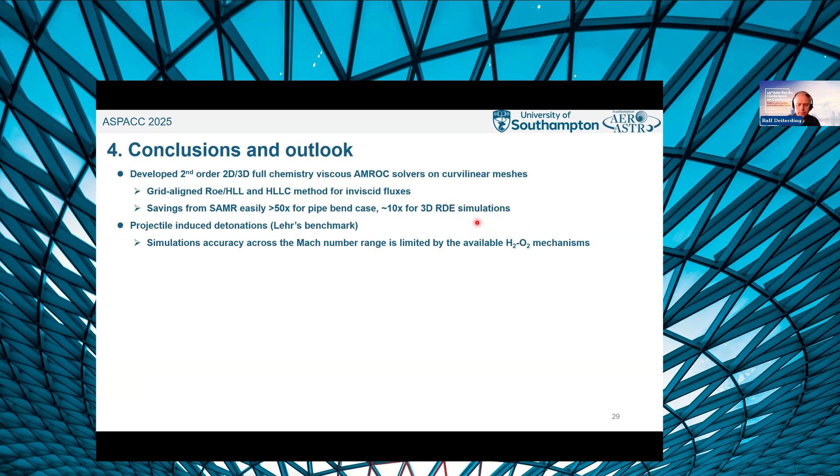Then we talked particularly about rotating detonation simulations, showing some premixed and non-premixed cases. The greatest challenge in simulating real-world RDE combustors is including all the loss mechanisms present. The primary loss mechanism, in my opinion, is mixing and the loss that happens due to realistic injector geometry—we are still using a cylindrical mesh and can't ideally represent the injector geometry.

In the future, I think we will put effort into modeling the injector geometry more accurately. I think this will be done by using the embedded boundary capability on Cartesian meshes as before, coupled with overset grid interpolation routines to the cylindrical combustor.

Finally, because somebody might ask, do you want to release a new version of that software? As you've seen, we have quite a few applications for the new mesh solvers, but we are still in the process of consolidating that. What is planned for the nearer future is to release at least the mesh capability for Euler and Navier-Stokes equations for constant gamma—not necessarily for the hypersonic or combustion case, but the constant gamma case has greater application. That is all I have for today, and I'm happy to take any questions.